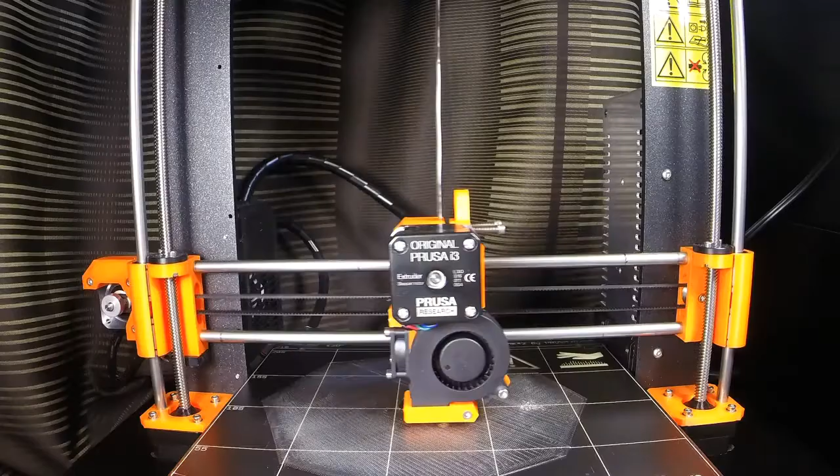Those of you familiar with my other videos know that I like to take time-lapse video of my prints. One of the things I was worried about was whether having a bed that moved back and forth was going to make time-lapse photography feasible. I was concerned the video would come out too jittery with the print constantly moving. But check this out, look how smooth this looks with the bed moving back and forth and the print growing right before your eyes. I really love the effect of that, so I'm happy that worked out.

I'm not sure if it was just my timing being right on this, but I'll definitely be experimenting with that a little more. People have been asking me what kind of crazy editing I did to get this effect. I really didn't do anything at all, this is just straight out of the camera. All I did was set my GoPro to one picture every 30 seconds, and that's the result.

I'm really happy with the way it came out, but I gotta say, one of the most impressive things is just being able to print something that can take up pretty much your entire bed and not have to fuss with bed leveling at all. So very happy that Josef Prusa was able to put a printer together that has automatic bed leveling that actually works.

I'm going to go into how I designed this, but before that I want to talk a little bit about the inspiration for this, which came from Maker's Muse, who did a video on designing the same thing but using Meshmixer. He goes into how he models it in Meshmixer and some of the things you have to know about or consider when printing with VASE mode.

So he did his video, and then Chaos Cortec followed with doing a similar thing but using the sculpting environment in Fusion 360. It's also a great tutorial, so I'm going to recommend you check out both videos. But Chaos Cortec's video came out a little more organic in shape, and so after watching that I thought, hey, I want to get in on this as well.

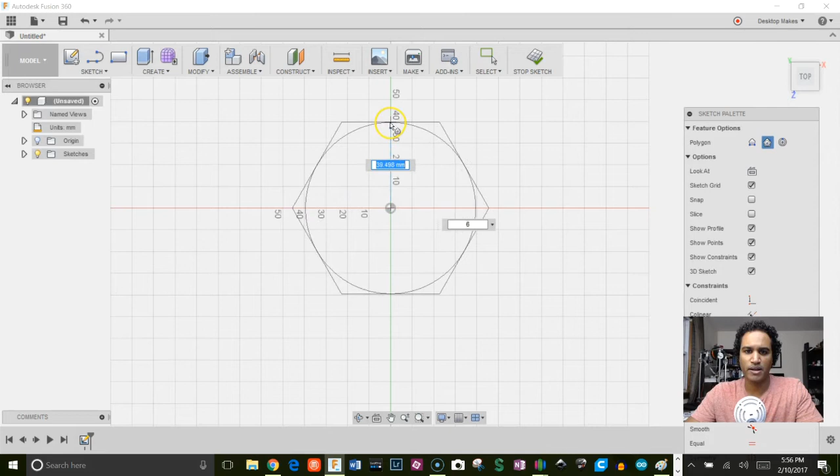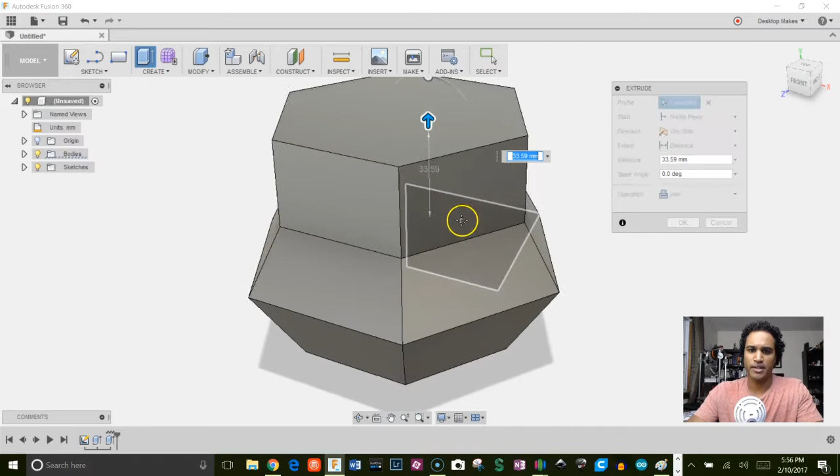We'll start at the center. You can grab any shape you want. I'm going to go with the hexagon here, and then we'll extrude that up. Notice that we have this taper angle here that we can take advantage of, so I can play around with this to get the different shapes I want. We'll open it up a little bit, extrude it again, close that angle a bit, then do one more extrusion and close that angle even more. You can see how we can start to play with this to get all sorts of different shapes that can resemble different crystals. But that's not it.

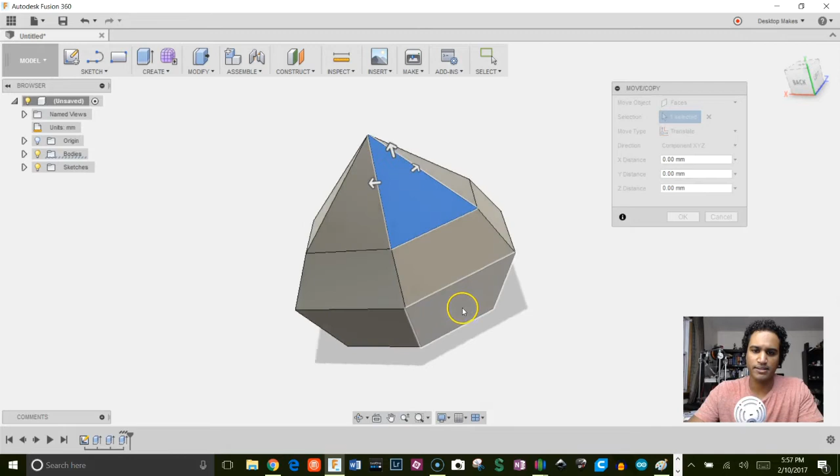We can also go in and right click and choose Move/Copy. I show a good example of how you can apply this with my video on the GoPro polyhedron stand, where I use this method to quickly get the different angles I need. Basically, once we select faces, we have the option of coming in and choosing translate to manipulate these faces, or we can just go to free move, and we have all sorts of options here.

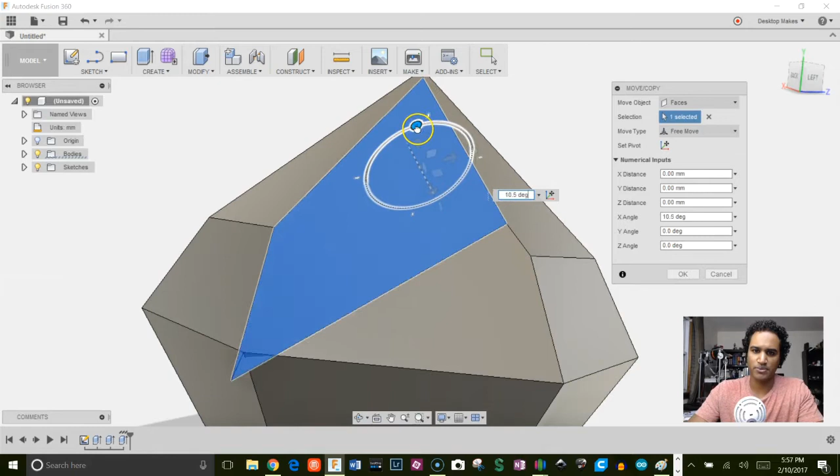I find it a little overwhelming sometimes with too many options, so what I like to do is just kind of go in. For example, if I want to rotate, I'll just choose rotate, and then you can select the axis you want, and that basically becomes your hinge, and you can move these faces around to get the angle you want. So you can see how you can start playing with that and really start creating all sorts of shapes.

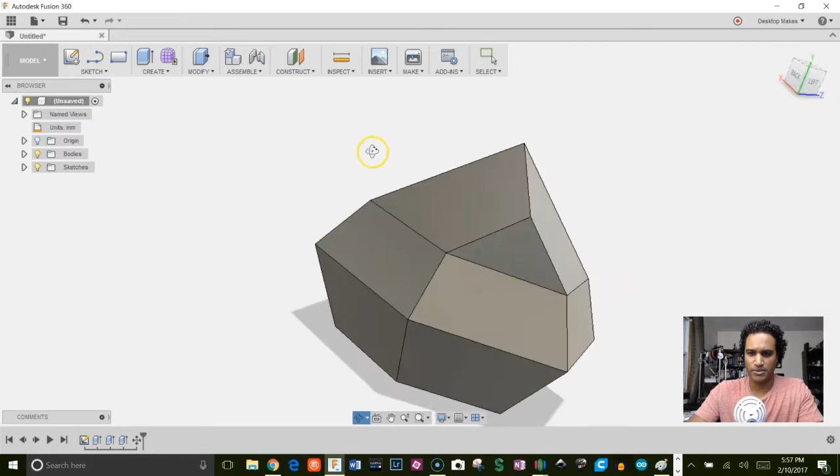The other way I'm going to show you is here. I'll open up a new design and we're going to go into the sculpting environment. If we click on create form, we're now in sculpting, and I got to give credit to the Adafruit guys, Pedro and Noe, who did a tutorial on this and showed me how to do this.

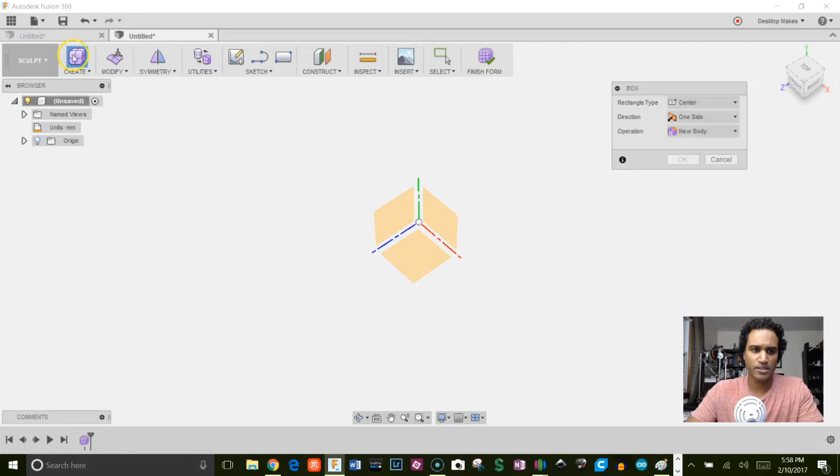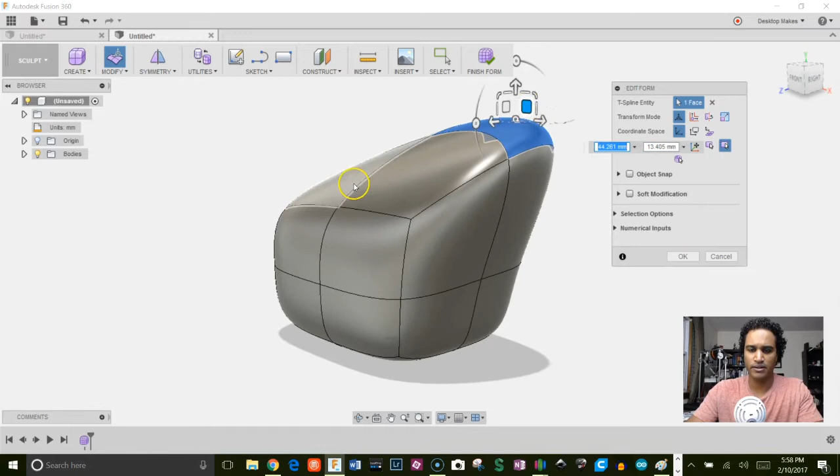So learn from them. But basically what they show us is you can go ahead and grab any shape, like any one of these primitives here. For example, if we grab a box and draw a box here, we'll move this up, and if we then go to edit form, we can start moving this around. But the problem is it's still that sort of very organic curved shape, and we want that low poly count type of look.

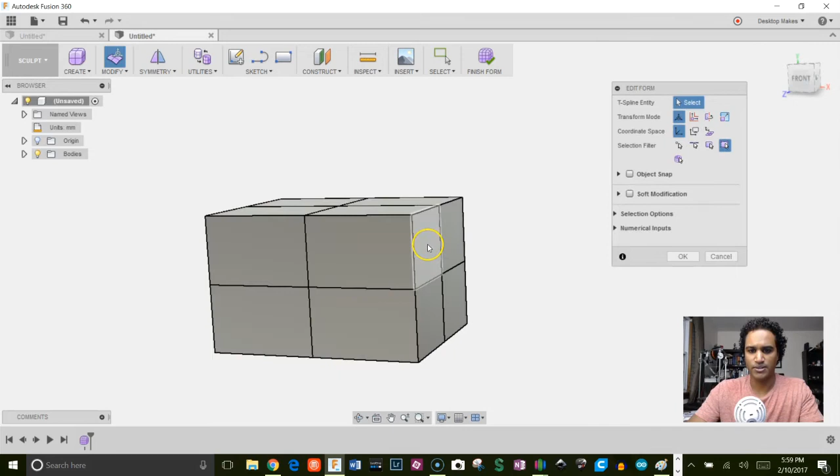So let's undo that, and we'll select everything and go to crease. Now we get this very boxy shape, but we still have the option of going into edit form and still being able to manipulate these faces and edges. So I can grab a face and drag that out, or I can grab an edge and drag that out, or I can even manipulate vertices, just grab that point and drag the whole thing up. You can start to see how this can begin taking shape.

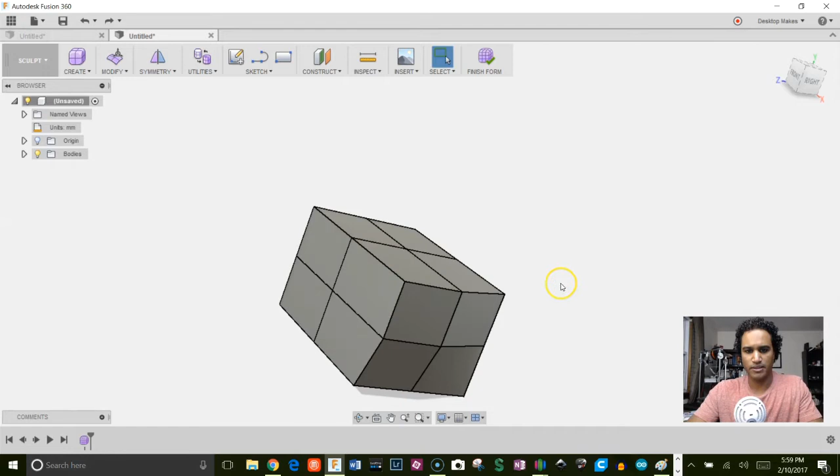Let me go ahead and undo all that, and I'll show you one more thing. I can grab multiple edges, for example, by just holding Control and selecting multiple edges, and then grab this arrow and drag this up. Check that out, I made a sort of a Tudor style house without even trying. So this can be a pretty powerful way of modeling.

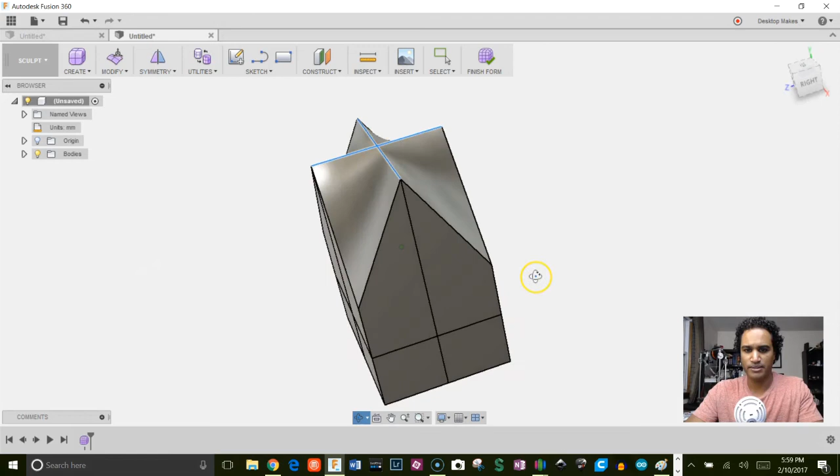We don't have to limit it to the square though, we can really just grab any shape. So let me delete that and grab a different primitive. Let's choose the quad ball and create one. We'll give this a diameter of 80 — we can always scale it later. Span faces, I'm going to keep it at 2 to keep it simple; we can always increase that and give it more faces. I'm going to not do a symmetry, and I'll click OK.

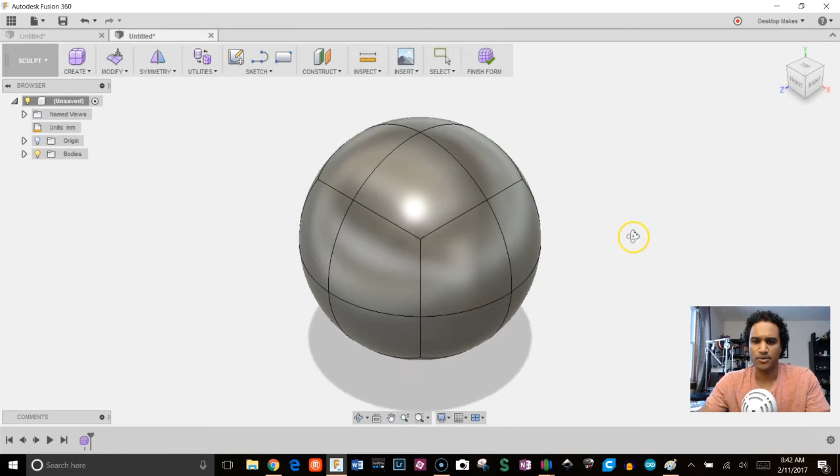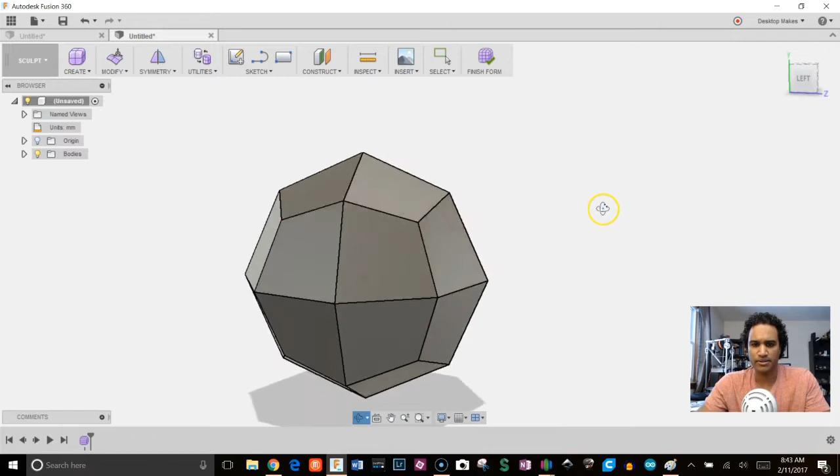So we're going to do the same thing here. I'm just going to select everything, right click, and go to crease, then click OK. You can see we got that boxy shape. If it looks rounded in the back but boxy in the front, make sure you have under selection filters select through selected when you make that selection. Alright, so we can see it's starting to already look like a crystal, but we can still modify this quite a bit. So I'm going to start off with just highlighting the top half, go to edit form, and just kind of bring this up a little bit.

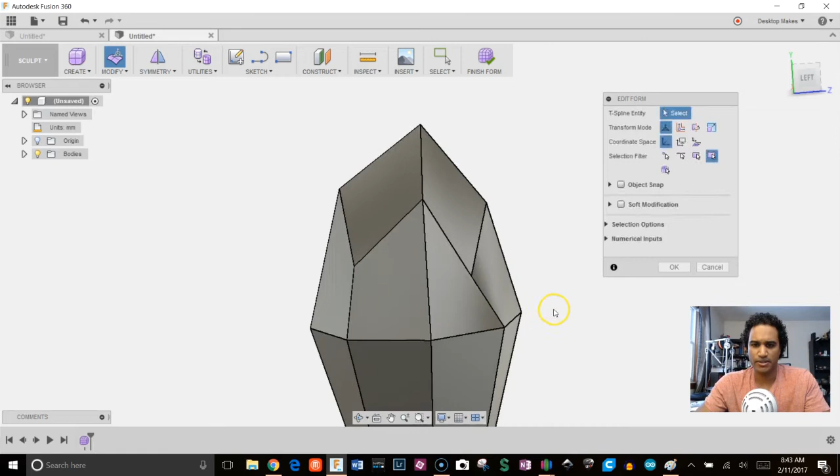And let's go ahead and we'll select these different edges, these 4 different edges, by holding Control, and let me bring that up. And then I'm just going to select just that vertex there and bring that up a bit. I can select this and maybe give it a little rotation here. And what else? So you can have fun with this, you know, you can get pretty creative. It's easy to get carried away though, so I'm going to try to constrain myself here.

So let's go ahead. I'm going to grab this entire loop, maybe bring that down a bit, and then I'm going to click OK, and I'm going to insert another edge right in the middle there. So I'm going to right click and go to Insert Edge. Bring this up, click OK. Now I haven't creased this, so notice if I go ahead and try to edit this, I'm going to get a rounded effect, so we don't want that.

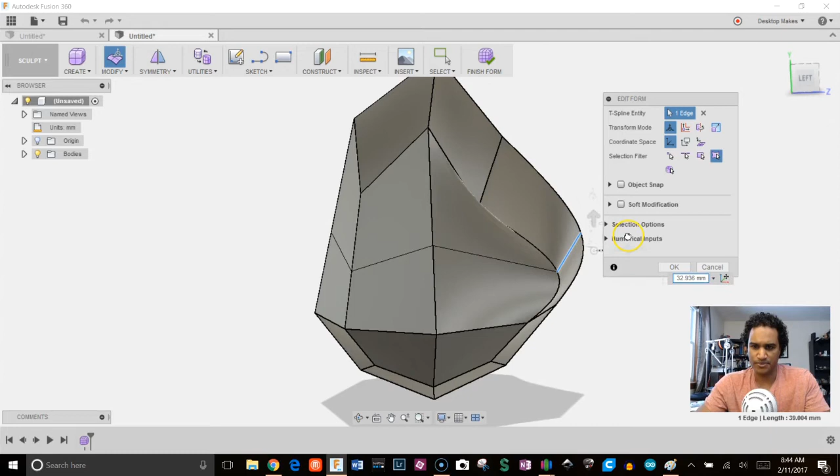So I'm going to just double click to select that entire loop, right click and choose crease, and that'll go ahead and do it. So now I can go ahead and grab this and just continue to manipulate this. Now we have to be careful here with these angles.

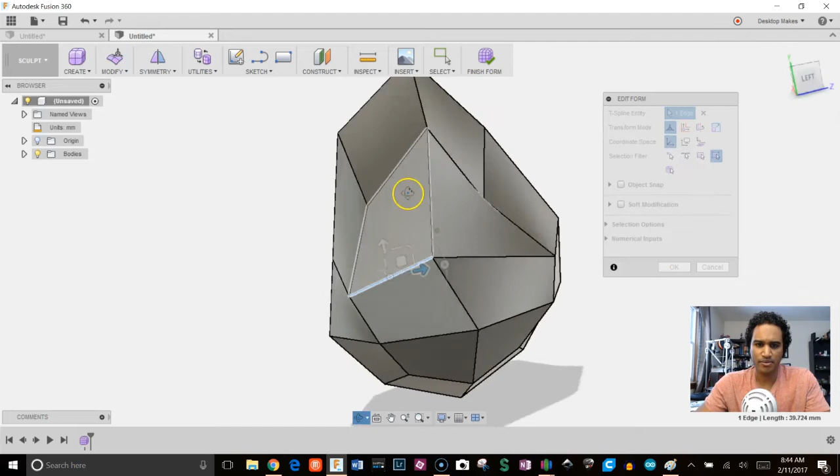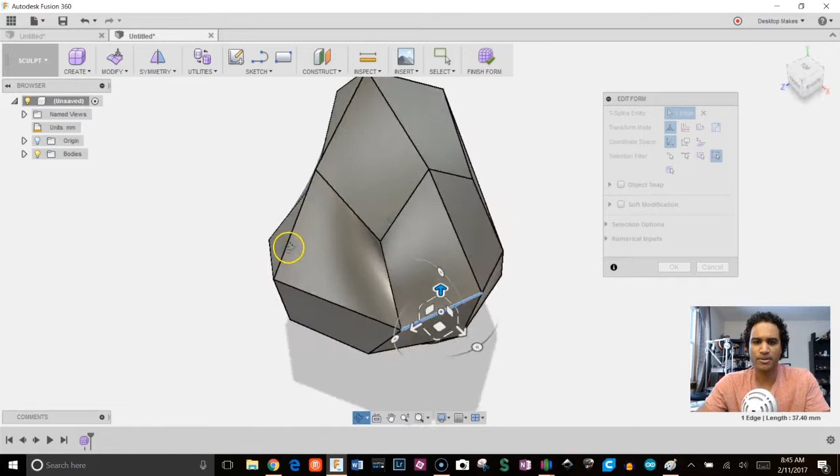So if you saw in Maker's Muse's video, when he's finished with this, he exports it into Mesh Mixer to take a look at those angles and see if they can print. Because if they're too shallow, we're going to have problems, because we're going to be using vase mode, and that layer adhesion will not work if they're too shallow. It just won't stick. So all right, I'm gonna try to stop myself here, and I'm gonna click OK. We're gonna finish form, and let's go ahead and cut off the bottom.

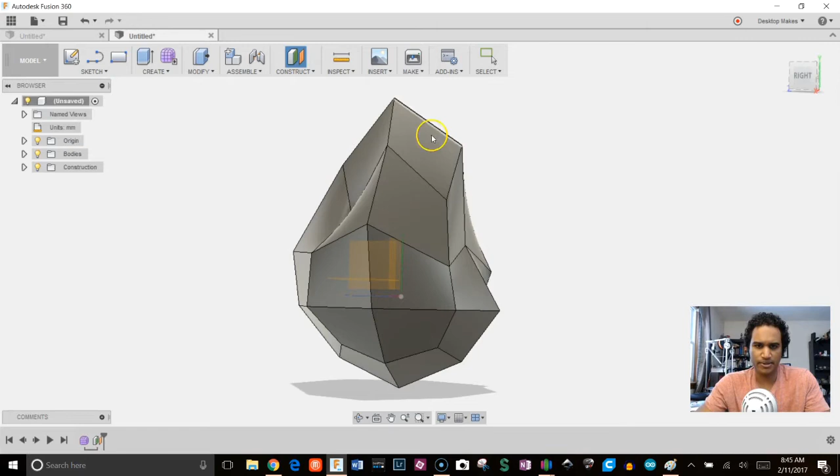So what I'm going to do is bring our origin in so we see it, and I'll go to Construct, Offset Plane, grab that origin, bring it up just a little bit right there, and then I'm going to go to Modify, Split Body, choose my cutting tool, which is going to be that plane I just created. Click OK. I can see the 2 bodies that I have, the top and the bottom. I don't need the bottom, so I'm just going to right click and go to Remove, and check Origin and Construction. So there's our crystal.

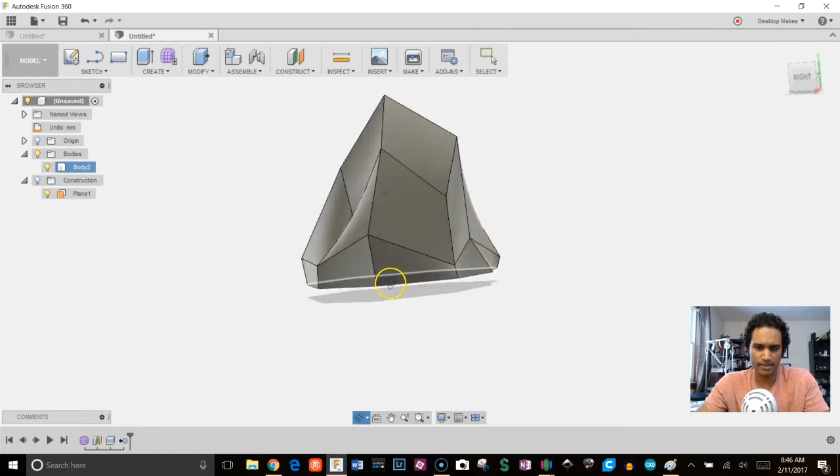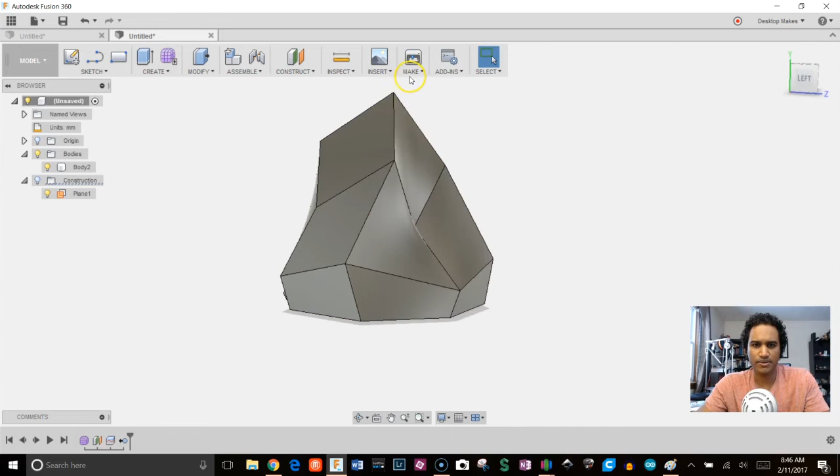Actually, I wanted this to be a little lower, so let's go back and adjust where that plane was cut, which is easy to do. All I have to do is go back to my timeline. Here's where I made that plane. Let's toggle body on, bring that down a bit more, click OK, and there you go. So that looks good. Let's go ahead and send this to Simplify 3D, and I'll show you guys how we can use Simplify 3D to check those angles.

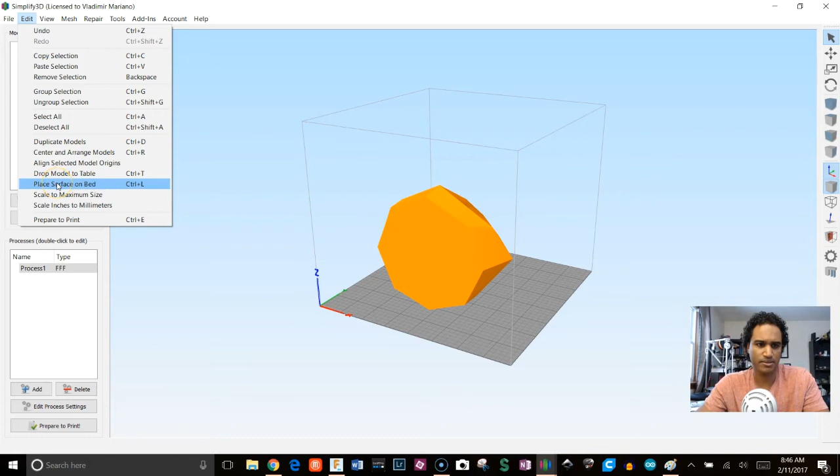So we'll make 3D print, choose that body. It'll open up Simplify. Let's get rid of our old one there. I'm gonna place the bottom surface on the bed. So I'll choose Place Surface on Bed, and then I'll center this. So to check those angles, what we can do is use the supports feature here. I'm going to click on supports, and I can give it an angle that I want to test. So I can say automatically generate supports. It's not generating anything, so basically it's telling me I'm good here.

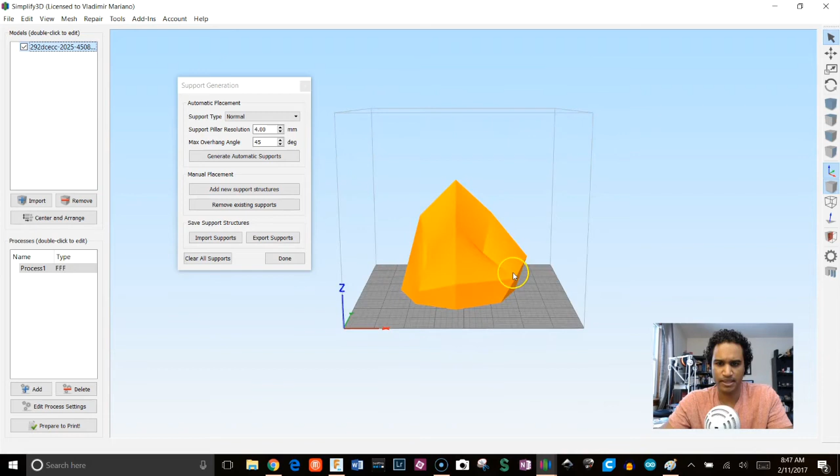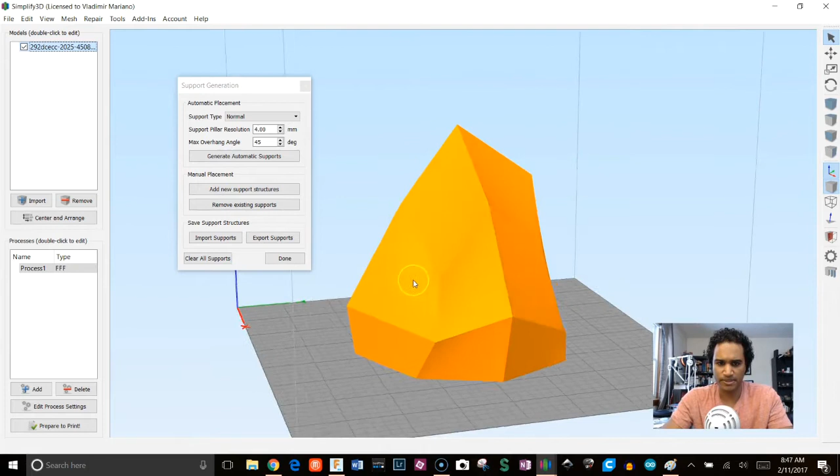If I bring this to 20, it's gonna show me, okay, that doesn't meet that angle, so it'll draw supports there. But let's go back to 45, because that's the angle we want to watch out for. I can probably even go up to 50, but we'll keep it at 45 to be safe. So I'm gonna click done, and then we're gonna have to flip this around to check the other side as well. So what I'll do is go to Y here and do a 180 flip.

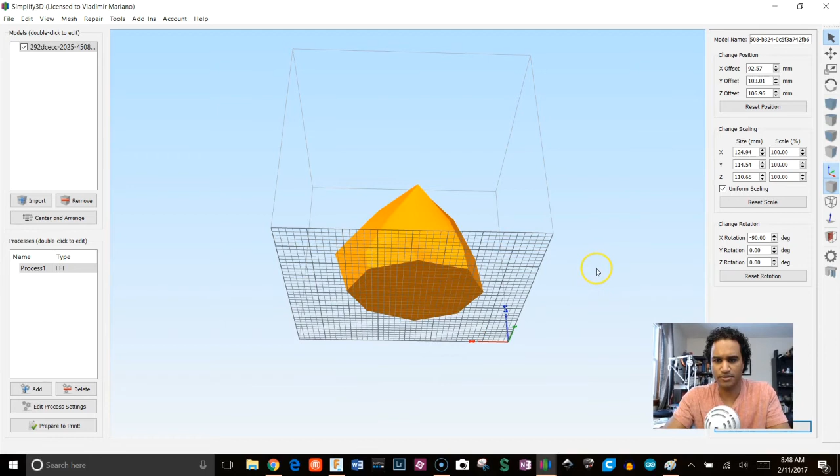That didn't work. Let's try that again. I'm not sure what just happened. We'll go to Y, do 180. That should flip it 180. And then let's Z offset to bring this up. So I'm going to go up. Let's do 210.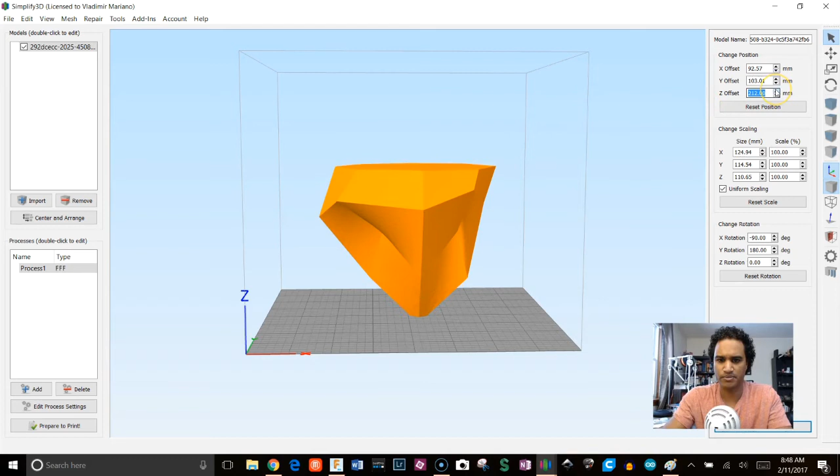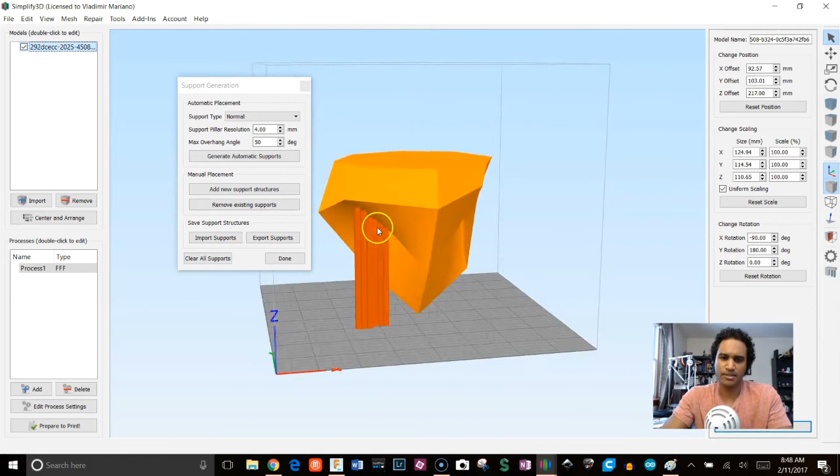So that's fine. I just want to check these angles here. Actually, I can bring that up just a little more. So what I'm going to do is go back to generate supports. Let's go to auto generate. Okay, so we see we have a problem here. This angle is not going to work. That's too shallow. So let's see how it does in 50. Reduces a little bit, but still not there. Still doesn't meet that angle that I set.

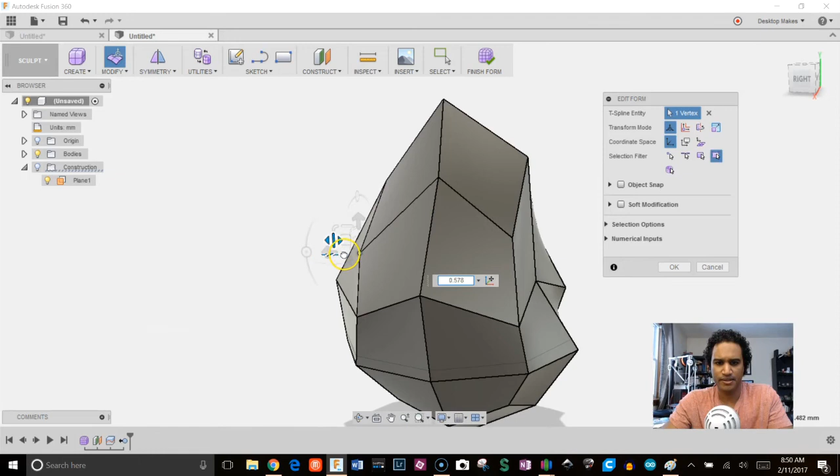So let's go back to Fusion to try to fix that. So I'm going to take this. Actually, we have to go into edit form first. So let's grab this. And we're going to bring that out a bit. Actually, we'll even make it more sort of convex there. And let's try that. We'll click OK. And try it again. So go to finish form, make 3D print.

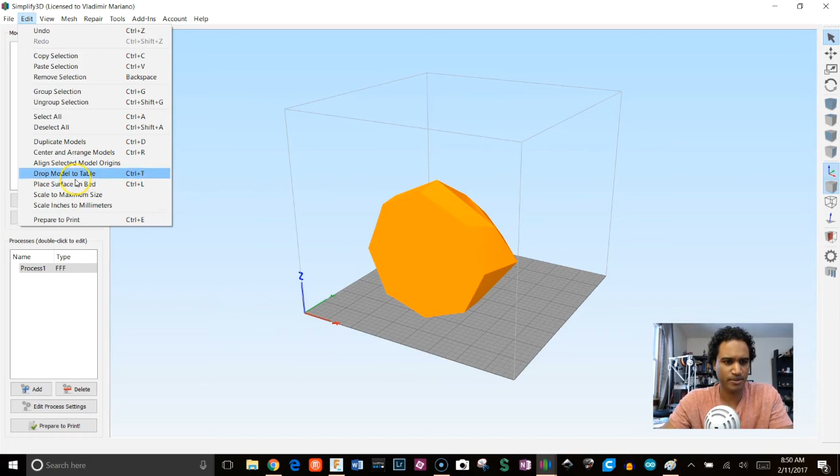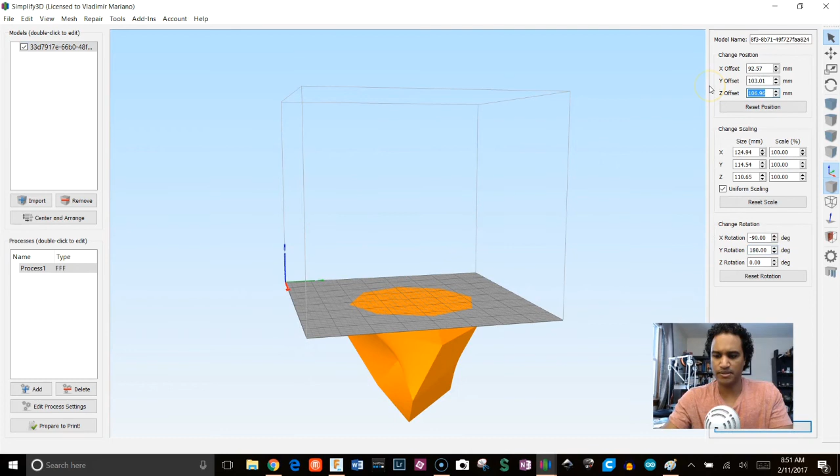Bring that into Simplify. We'll get rid of our old one there. It actually would have been easier if I had just flipped this in Fusion, so it just imported all the same way. But that means I have to do one extra step here of placing this surface on the bed and then centering it. So again, I'll double check this, but I'm sure I'm going to be fine with this orientation. So we'll go ahead and flip it. Again, I'll do a 180. Bring this up 215, and then we'll generate supports again.

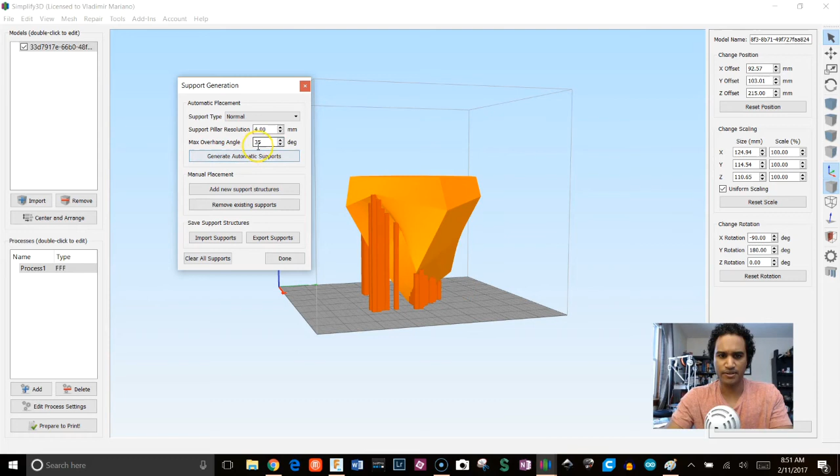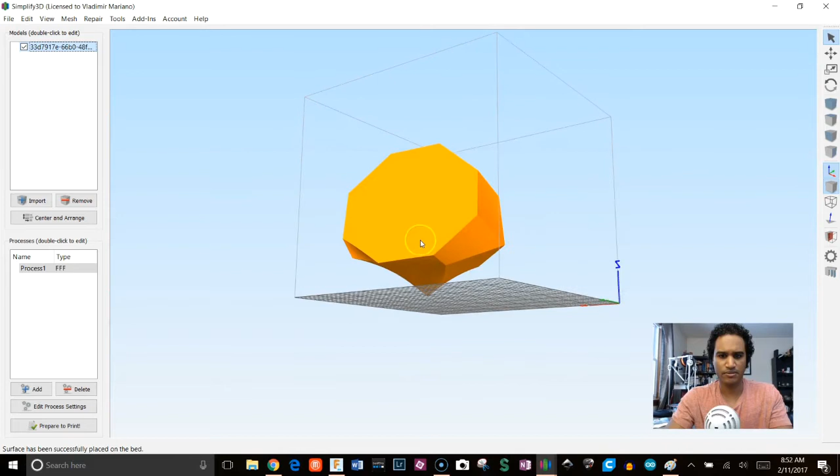Okay, that looks good. So that fixed the problem. So we can see, if I brought this down to 30 degrees, I start to get all sorts of supports. 35, they start to go down, 40, and then 45, they're completely gone. So this should print fine. We'll go ahead and test this out. So let me click done, and I'll reorient this. So let's go to place surface on bed. Try that again. Edit, place surface on bed, choose this, and then we'll edit, center and arrange models.

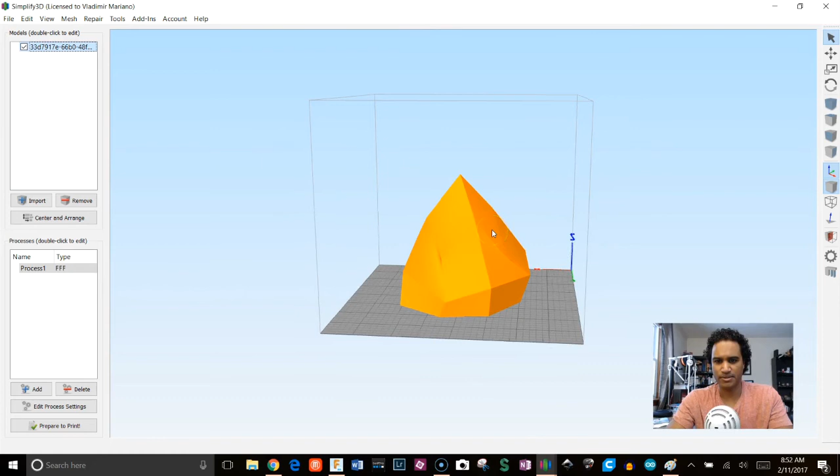So there we go. I think I'm going to do a small test print first before I actually try a huge one that'll maximize the whole bed. So yeah, we'll scale this down a bit. Let me see. Let's do scaling. I have uniform scaling on, so I'll set the Z height to 80 and everything should scale uniformly. So, okay, I just want sort of a quick print just to test it.

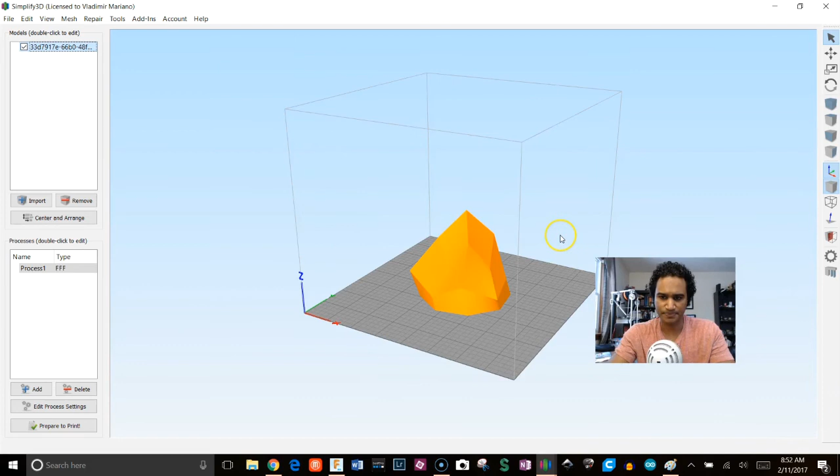Let's click on our processes here, and under layer make sure we have single outline corkscrew print mode. So that's the vase mode. I have top layers as 0, bottom layers as 3. 2 perimeters, it's going to override that because it's just going to do one shell around. I will increase the primary layer height to 0.3 just to print this a little faster.

The higher you go on that layer height, the less your layer adhesion is going to be, just because it's moving up a bigger distance each interval. So if I was to go to like 0.2 or 0.1, I could probably get away with a higher angle, maybe 55 or 60, but we're going to keep it at 0.3 just because I want this to print fast right now. So I'm going to click OK.

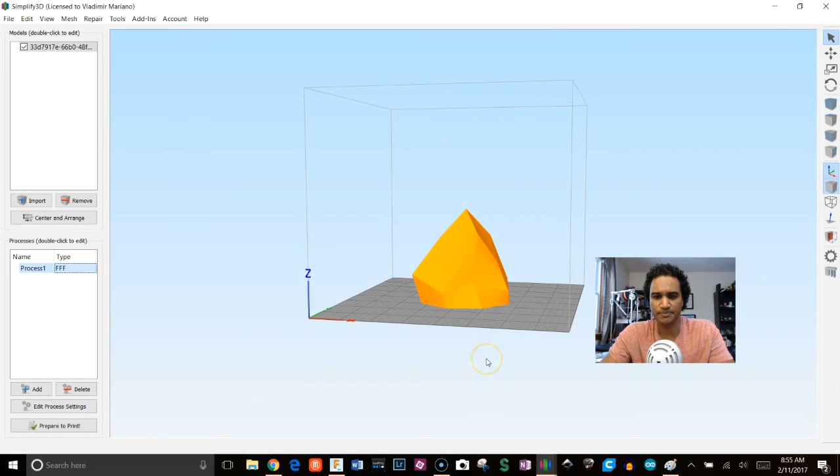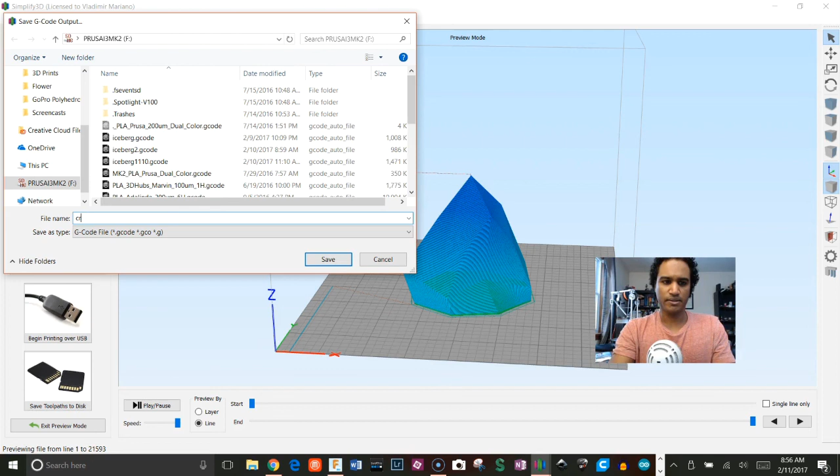Alright, next it's going to tell me you're using spiral or vase mode, so it's going to override all your other settings. I'm going to click yes, and let's go ahead and simulate this. Okay, that looks pretty good. I'm going to save it to my SD card. We will call it Crystal. Let's save and let's send this to the printer.

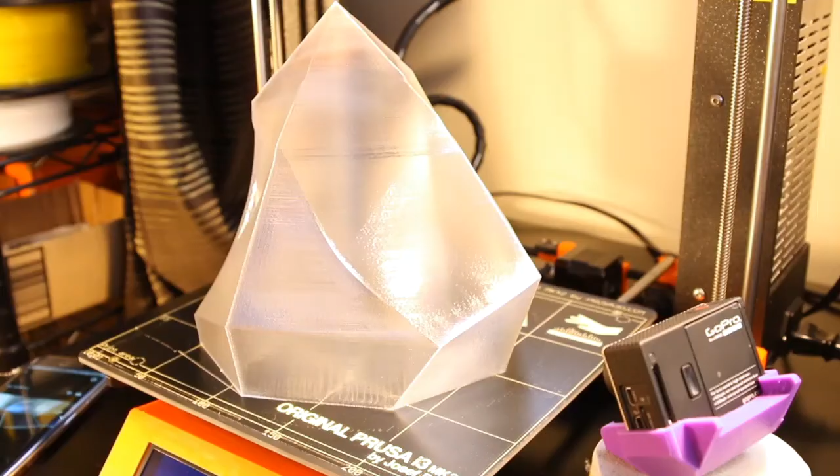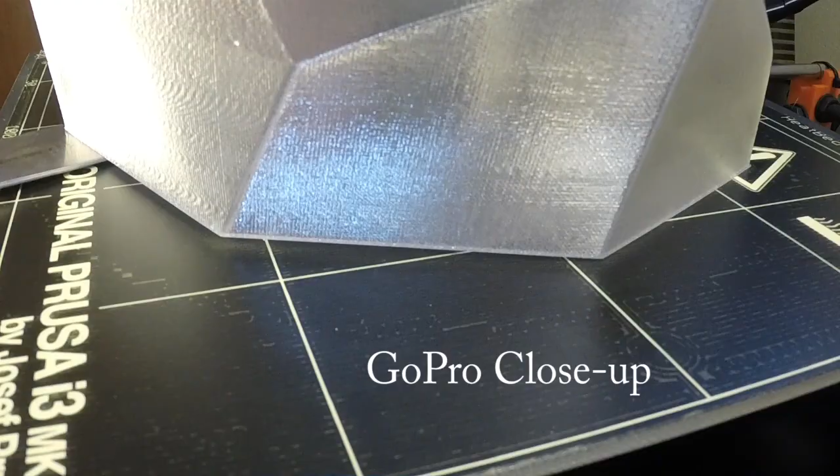Here's the time-lapse video one more time just because I can't help myself and I really love this video. As you can see, this is the scaled up model where I took advantage of the entire bed size. And here is a video of me just removing the object from the bed. I just want to show you guys how easy this was. I know in other printers it can really be a pain to remove something of this size. Anyone recognize this GoPro stand over here? Here's a close-up from the GoPro taken at that angle.